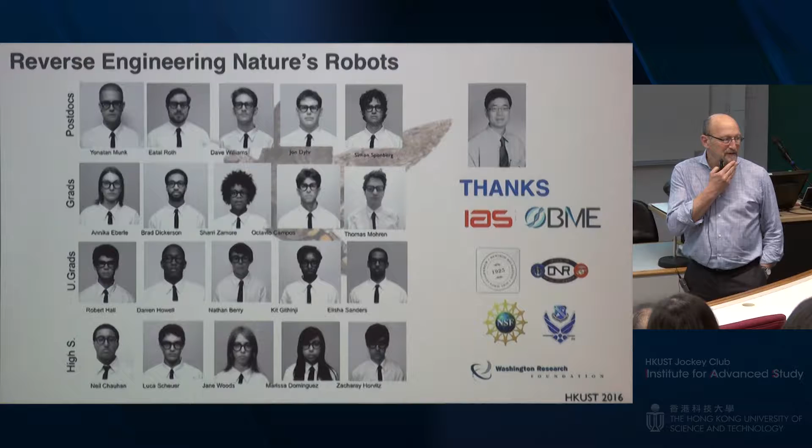The Naval Research, National Science Foundation, and the Air Force Office of Scientific Research are funding a lot of the research I'm going to talk about today. The most important thing is who really does the research and who really does the creativity. I listed here most, but certainly not all, of the people involved in the projects, spanning some fantastic current and former postdocs, and some fantastic current and former graduate students, undergraduates, and high school students who have all been involved in the research in various ways.

I showed this to the group last year, and I wanted to bring it back again. This is a publication that came out from the National Research Council in the US, and it has an interesting statement. It says biological research is in the midst of a revolutionary change due to the integration of powerful technologies along with new concepts and methods derived from the inclusion of physical sciences, mathematics, computational sciences, and engineering.

To be a biologist today is becoming more and more an integrated discipline, one that lies between the physical sciences and the natural sciences. It's just increasingly hard to make great progress without being somewhat quantitative, okay? So that's a message we have for biologists. At the same time, advances in biological sciences hold immense promise for many challenges we face, from food, health, and safety to deep understanding of natural systems.

There was also another study that came out from MIT, a study called The Convergence of the Life Sciences, Physical Sciences, and Engineering.

Essentially what both of these are saying is our traditional bins—I'm in the biology department, I'm in the engineering department—those traditional bins are not particularly healthy. They're necessary for administrative reasons, but they're not healthy. This says the convergence of these domains is a new paradigm for how sciences are being done. Whether you call it life sciences or engineering, there are common themes among all of these, spanning healthcare, energy, food, climate, water, disaster relief, everything. These are really hard problems, but there are solutions useful in nature, and solutions useful in engineering.

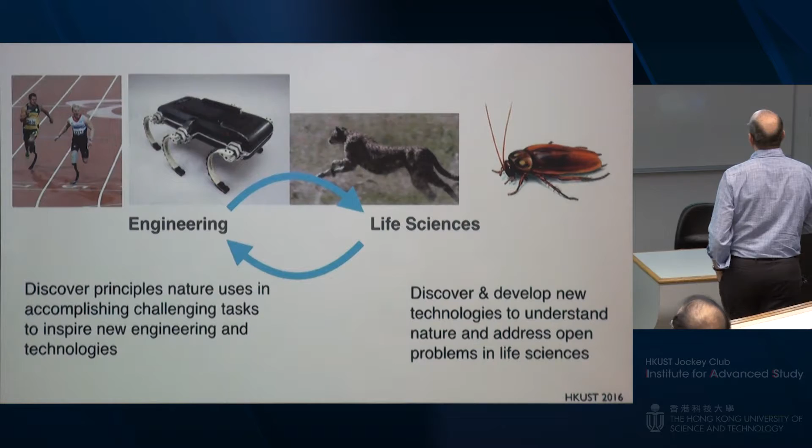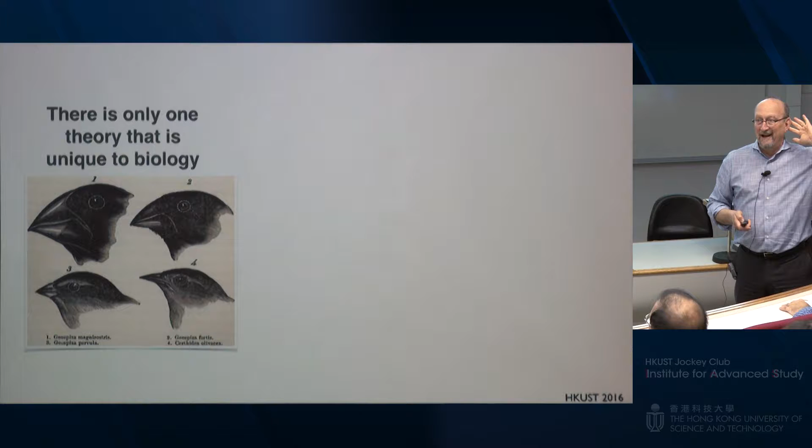Obviously, when we're looking at natural solutions to engineering problems, we have to think about the fundamental theories of biology. As it turns out, there's only one theory unique to biology. What is it? Yeah, absolutely—evolution. Let me drill down on this.

It is a very, very patient engineering process. It takes solutions that are not as successful as other solutions and essentially eliminates those, okay? It's got lots and lots of time and lots of versions, okay?

It relies on three fundamental ideas: there is variation in traits. That is, I'm not identical to Professor Sané, and I'm grateful for it.

And I also have traits that are heritable, so those traits pass on from successive generations. And we have differential survival, although I think we'll both make it out of this talk today, okay?

Evolution is subject to constraints. This came up in the last talk. That is, I'm not free to all of a sudden take my bones and say, you know, I think I'd like titanium today. I have evolutionary constraints, developmental constraints, and historic, phylogenetic constraints. I'm not free to just create anything new. So evolution is this infinitely patient engineering process operating under constraints in history, okay? So that's actually a really interesting idea, that you're solving really, really hard engineering problems given really important constraints. It is necessarily a process that leads to change and adaptation, necessarily.

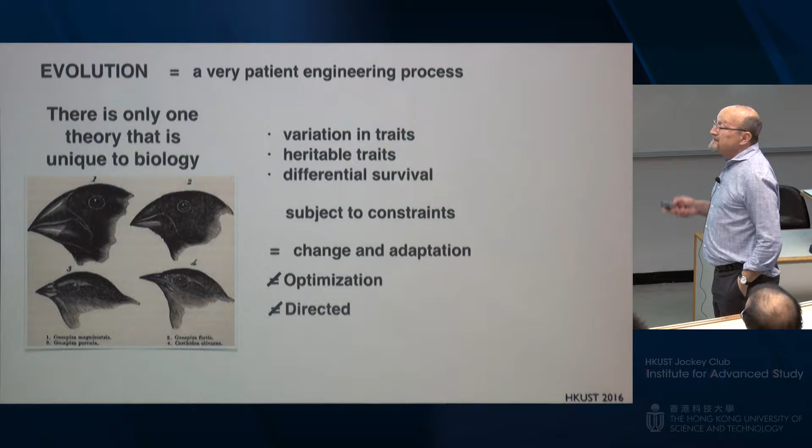It is also not an optimization process. This is often misunderstood. Evolution is not optimizing. It's simply, I can run faster than my friend who's being chased by a cheetah, okay? As long as the cheetah gets my friend, I'm okay, right? It is not directed. Evolution does not say, I will make it better this way.

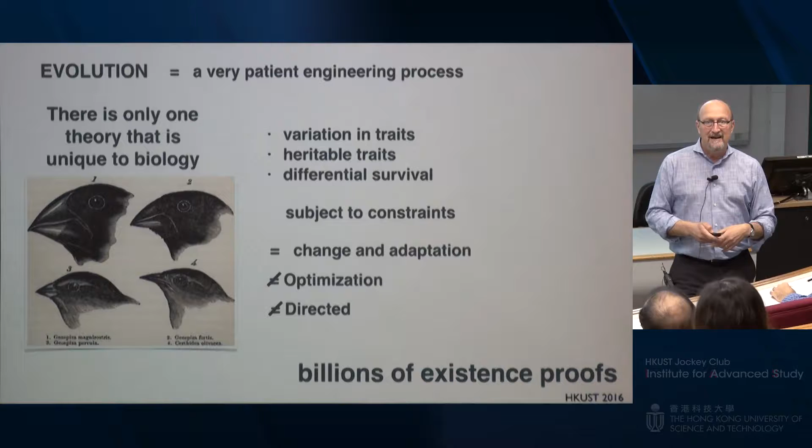But that said, it gives rise to these billions of existence proofs of solutions to really hard problems: locomotion on land, locomotion in complex habitats, obstacle avoidance, flight, swimming. The list goes on. Every habitat of life, every habitat on the planet has an occupant of some living organism somewhere, right?

This idea of evolution was certainly understood at the turn of the century. And I love this quote here, from the New York Times, October 9th, 1903. And I'm looking over at a group here that builds flying robotics. So in 1903, they say, the flying machine, which will really fly, might be evolved by the combined and continuous efforts of mathematicians and mechanicians in from 1 million to 10 million years. I mean, they were being optimistic, actually. They had a sense of the length of the fossil record.

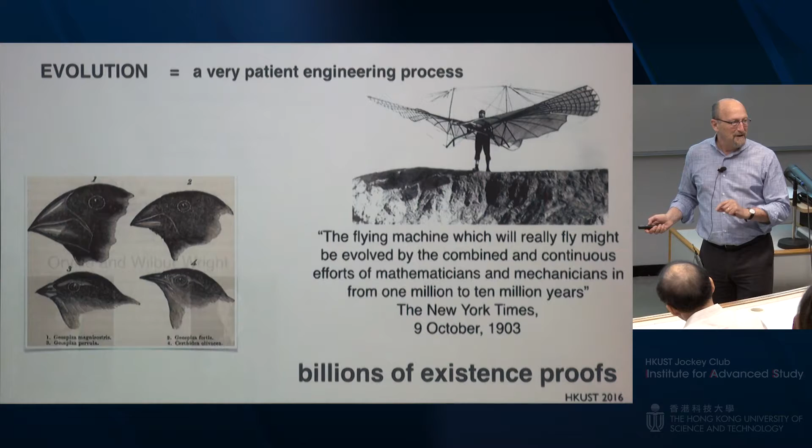That same day, in the diary of Orville and Wilbur Wright, is the following line: we started assembly. And that was for the first flying craft. So they beat evolution by a few millennia, okay? And what they did is they tinkered and basically tried lots and lots of things, right? But you'll also notice that they used some structures that clearly were done from observation. Clearly, it did not come out of thin air. I apologize for the pun.

It came from observation, right? And my favorite philosopher, Yogi Berra, the best catcher in baseball history with the New York Yankees, said, 'You can see a lot just by looking.' Great phrase. And in fact, that idea has a rich history in how we look to nature for our understanding of technologies.

Leonardo da Vinci produced something called the Codex, and actually Bill Gates recently bought the Codex, and that lives now in Seattle, and there's an Italian scholar of Leonardo who's studying the Codex. And there's a section of the Codex about life, and particularly, as it turns out, about flight.

And a recent translation, it gives me chills to repeat this, but I'm going to do it. This is in the year about 1500, okay? And he had been looking at flight and looking at a whole variety of creatures. These are drawings of Leonardo, his imagining of airflow and some ideas of force vectors. This is pre-Newtonian, this is pre-Bernoulli. This is Leonardo. And here's a translation from the section of the Codex called Sul volo degli uccelli, on the flight of birds.

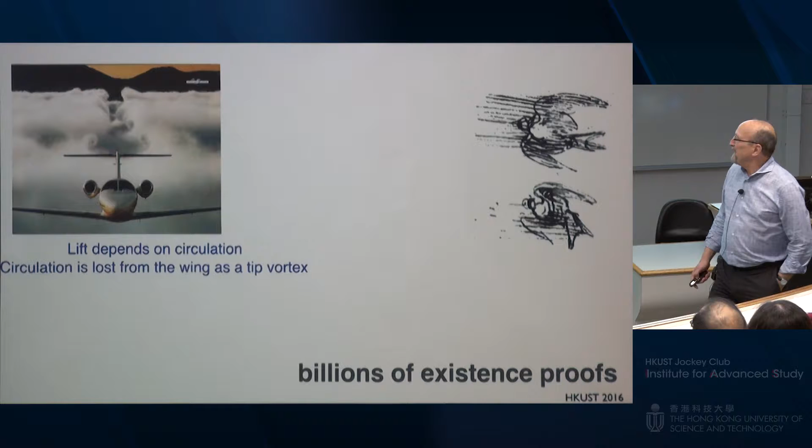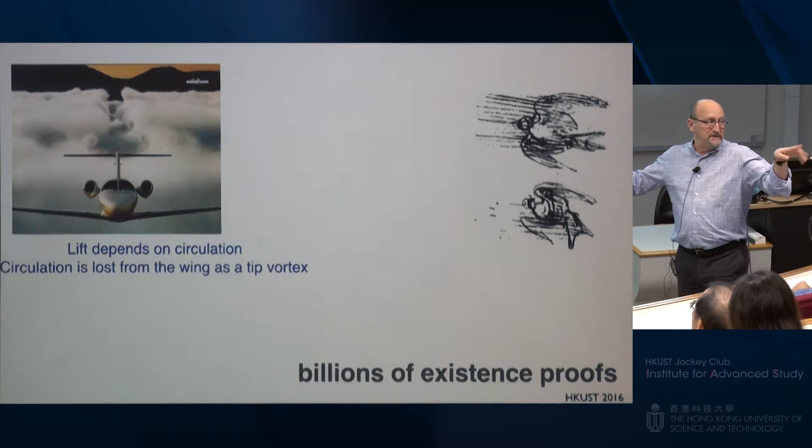This existence proof in our looking to nature in flight has a really nice recent history. Despite our watching nature for millennia, sometimes we ignore things that are totally obvious. This is a picture of a jet coming right at us, and you see in the wake this vortical structure, the vorticity shed from the wings, which leads to a tip vortex. That tip vortex represents a loss of circulation on the wing, a feature critical for the upward forces it generates. The lift depends on circulation, and circulation is lost from the tips in this tip vortex.

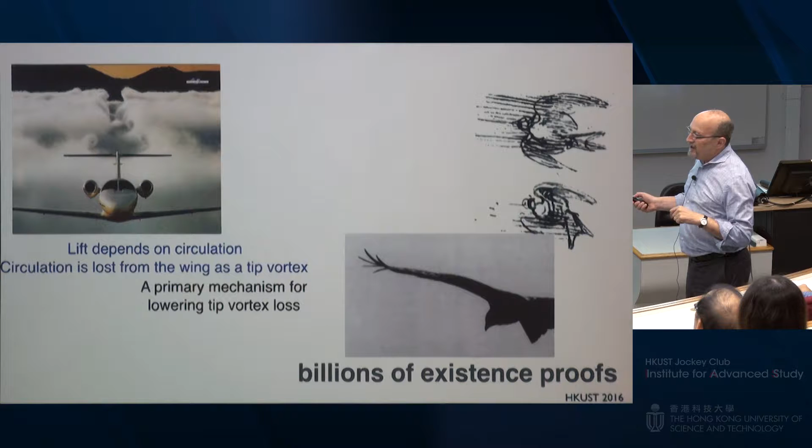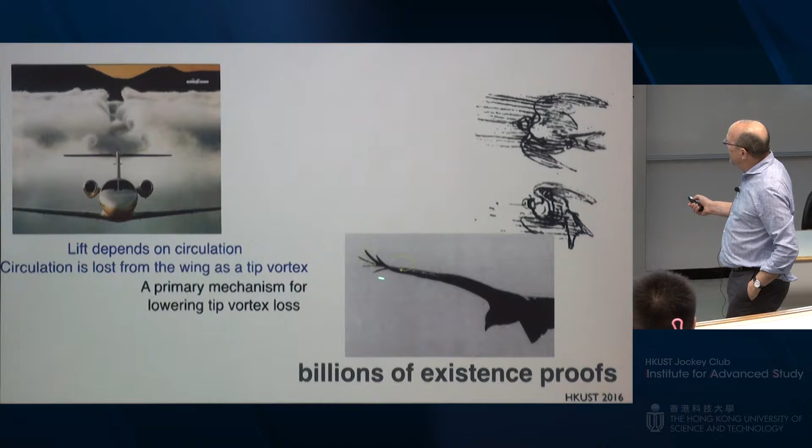In many flying birds, and other examples, the tips of the wing are highly modified into what are called spread wing tips. These spread wing tips are mechanisms that promote retention of vorticity on the wing by a complicated, not very well understood process, shedding vorticity into ever smaller ones and retaining more vorticity in wing-bound structures. It was only within the last 20 years or so that aeronautic engineers started modifying wingtips according to observations from nature—these are now wingtip modifiers. The process had been around, people had been talking about it, but it just took a while to translate from observation to application.

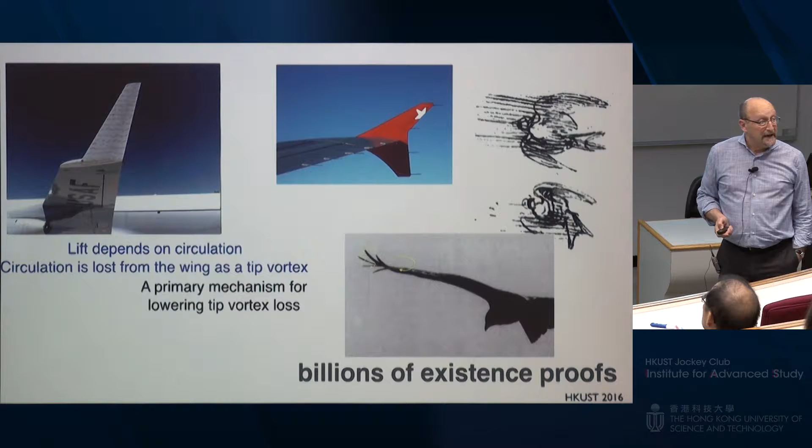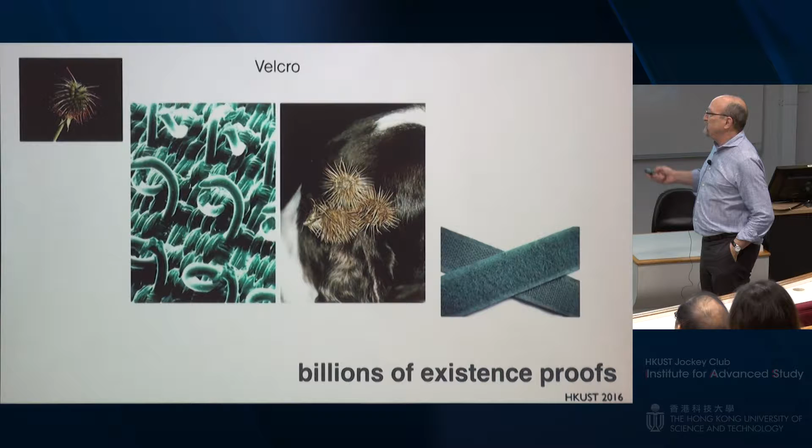The list now goes on—I'm just going to quickly go through a few. Velcro was discovered from burrs; some poor person kept pulling them off their dog, and eventually it gave rise to a really wonderful and ubiquitous, somewhat irritating fastener.

Water repellent paints have been around, but recently it was revealed that the microstructure of the Lotus leaf interacts with the surface tension of droplets to make paints water repellent. It's now called Lotusan—adhesion without glue.

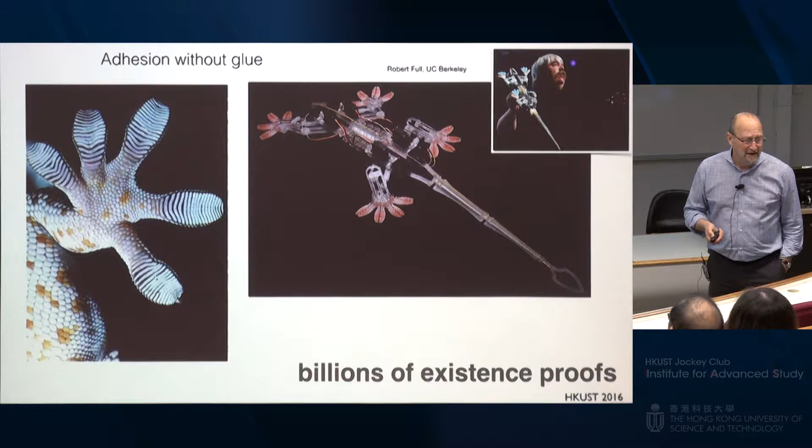This is something Bob Full had been one of the early pioneers on, bio-inspired or nature-inspired systems. He's the editor of the journal Bioinspiration and Biomimetics, one of the founding editors. He spent considerable time demonstrating that the ultra-tiny microstructure on the feet of geckos permits van der Waals forces to form effective adhesion—there's no glue. They've tested it in robotic systems and gone on from there. This is him giving a TED Talk; if you want a really inspiring speaker, bring Bob Full. In many ways, he's a big man in the field.

Water capture discovered passive mechanisms from beetles in the Namib Desert. The beetle has a particular microstructure on its carapace so that when wind blows over it, local aerodynamic effects lead to condensation of fluid, which drains down. A group of investigators took this concept and built passive water capture devices for arid environments. This is just wonderful, and it goes on and on.

Aerodynamic efficiencies in car design, believe it or not, actually is a good design. I've never been impressed by it, but apparently fluid dynamicists are impressed by it.

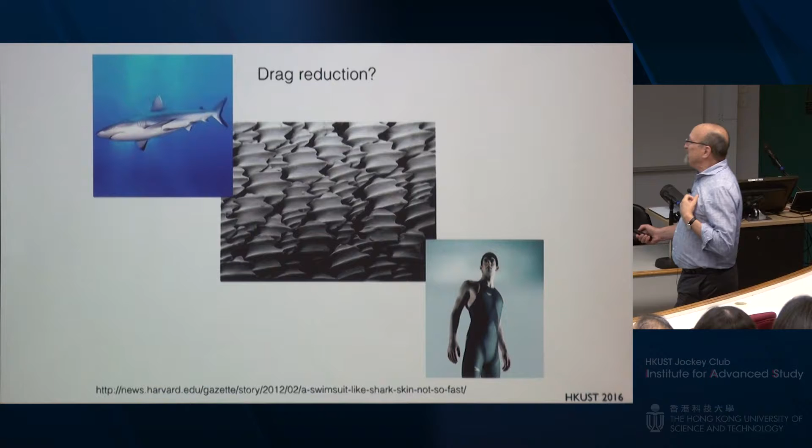One of my favorite stories is going too far. This is a great controversy: sharks have amazing microstructures argued to be drag reducing, and there was evidence that shark skin gives lower shear stresses. They made a swimsuit—Michael Phelps of swimming fame, Olympic medalist, wore a suit with that microstructure. Then there's a wonderful article that says actually it doesn't work. But it was a great idea. So you have this really scratchy suit that doesn't do you any good—it works well for the shark, poorly for humans. There's a message there: don't just copy it and think it's going to work. It works for the shark because of the shark's geometry and how it swims; it works poorly for humans because of how they swim and their geometry. There's some evidence it actually slows you down, which I liked.

Sensing and computing—I talked about that last time, from optic flow sensing and the circuits supporting it, to circuits supporting edge and object recognition, derived from looking at neural circuits in the retina. Those are really, really interesting problems. And of course, the thing I'm going to talk about are inertial measurement units.

So I wanted to just very quickly survey some fun natural solutions to engineering problems—extracting water, swimming, flying, whatever. Then what I'm going to do is focus on two projects. One Sanjay actually worked on with me a while ago—I'm not going to talk about that, sorry.

It wasn't very good work. No, just teasing, it was excellent work. It appeared in Science, but I'm not going to talk about it. And then something that we're just publishing now.

Okay, so inertial sensing. There isn't a flying vehicle that doesn't have some sort of IMU—good luck flying it if it didn't. And nature uses that as well. IMUs are present in commercial aircraft along with global positioning, and they have multiple IMUs. I don't know exactly how many are on a typical 747, but it's not that many, maybe a handful of inertial measurement units.

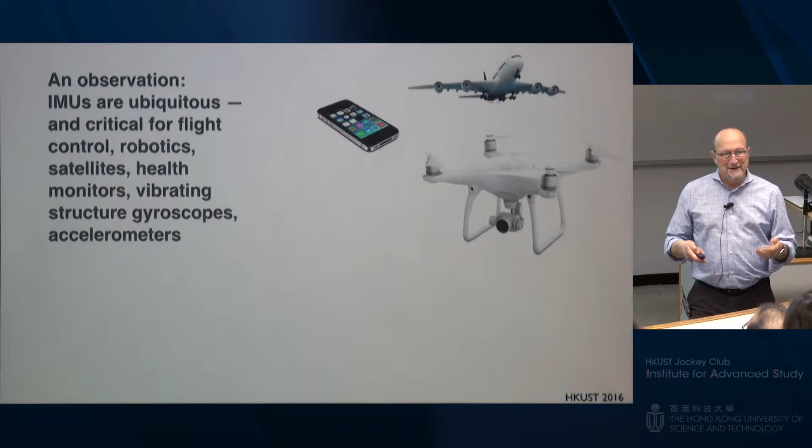Usually at least one 6 degree of freedom unit in a quadcopter, like this DJI Phantom 4, with camera—so it's got vision, it's got an IMU, it has sensing going on, capable of a lot of cool flight dynamics. I have an IMU in my cell phone, as I think most of you do. So they're everywhere, because they're needed for effective dynamic control.

And it turns out that flying animals desperately need them, because if you try to fly with just your visual system, it's too slow—I'll go over that later. Visual flight control is too slow for these inherently unstable devices to work, so they need multiple sensory streams for effective control of their dynamics. In fact, that's a common theme in biology: we need multiple streams of information for most effective control, and the richer and more complex these streams are, the better off we do.

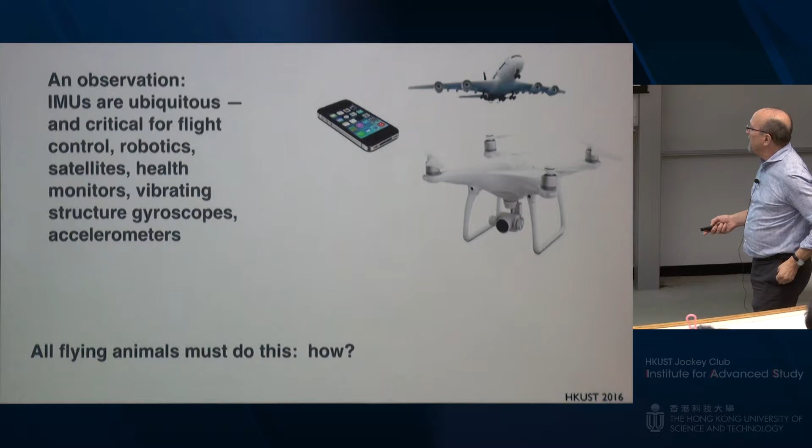Probably the most well-known biological gyroscope or inertial measurement unit is found in flies. Flies have the name Diptera—D-I-P-T-E-R-A—meaning di, ptera, two wings. So all the flies, that whole taxon, only have two wings. All other insects have four wings, and the back wings of these insects are highly modified structures.

These structures are called halteres. We have a collaboration with our colleagues at Oxford on these. These halteres, just like back wings, beat up and down, and as it turns out, they are richly sensed with mechanosensitive structures.

I'm going to do a demonstration of how this haltere works, using my arm. The haltere, just like the wing, beats up and down like this, and the wings beat up and down, the halteres beat up and down. In fact, on one side, they beat approximately anti-phase in most insects—there are details of the control of this.

If you take a mass and move it up and down like this, and rotate in the orthogonal direction, you'll establish a Coriolis force. That mass beating up and down will experience a torque driving it into an oscillation in the off-axis. I'm going to rotate this so it makes more sense—here it is beating up and down, and the scale is roughly pi up and pi down, so it's a huge angular change. But in the presence of an orthogonal rotation, that weak Coriolis torque drives a lateral displacement, operating at about twice the frequency.

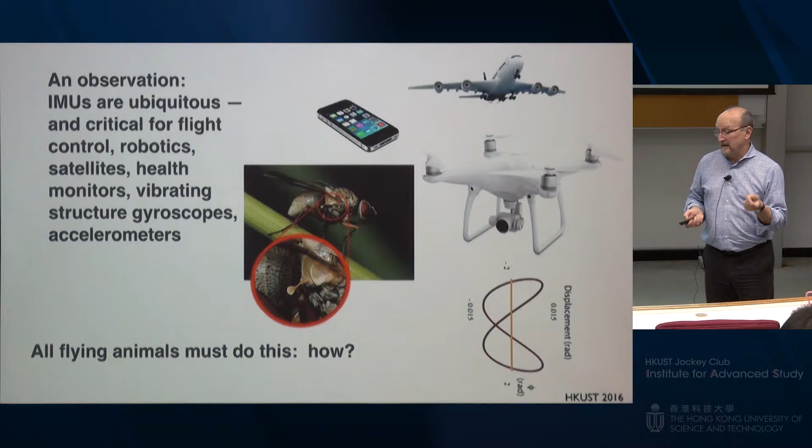That lateral displacement—there's some controversy now emerging on how it's detected—but it is detected by a set of sensors at the base of the haltere. This is a high-resolution micro-CT of a haltere from a fly. There's the knob at the end, so it's got a mass that it vibrates. There's a long shaft, and this array here is a set of strain sensors—actually a row of them. The visual image looks like a line, but there's a discrete set. Cumulatively there's a chunk here, a chunk here, and chunks on the other side as well.

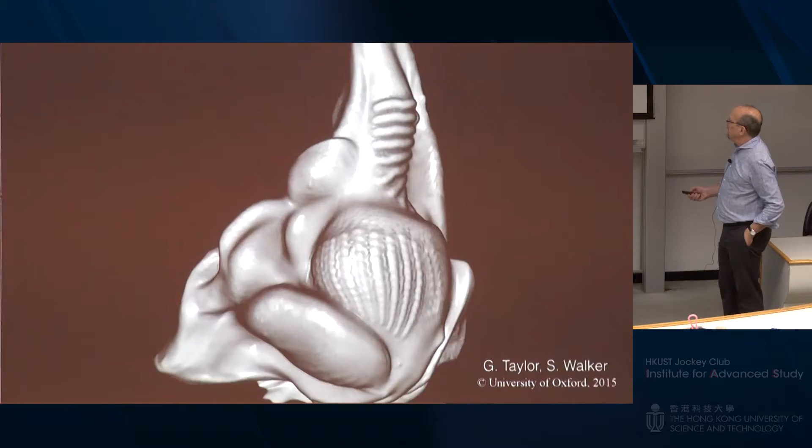That structure has an amazingly complex base, and this is vibrated up and down. There you can begin to see the separate units of sensing—that's a lot of strain sensors at the base. By the way, we have no idea how the nervous system is actually processing all of them. It's an array, and there's something about array detection that we suspect is a very, very interesting problem here.

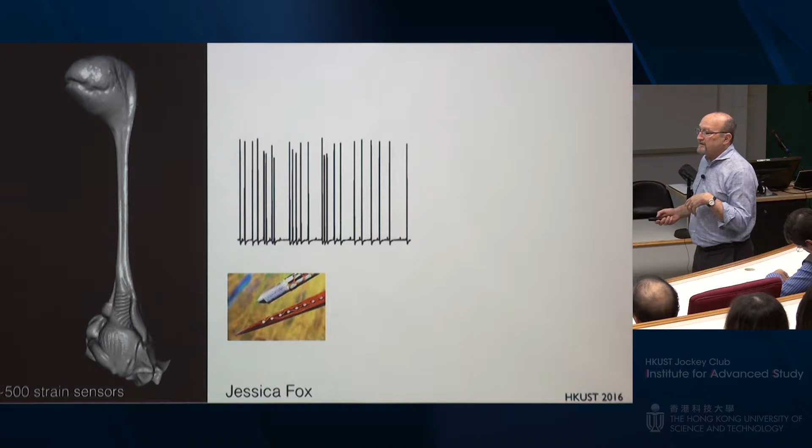What you can do, and what past graduate student of mine, Jessica Fox, now faculty at Case Western, did, is record with very fine electrodes in the axons extending down from these sensors, and measure their encoding properties. I talked about that last time, so I won't repeat it here. But suffice it to say that they encode information at an extremely high rate. Not only are they a dense array, each individual is encoding at a very high bit rate, about 200 bits per second per neuron. Given the number of neurons, that's actually a pretty good sensor that you've just produced.

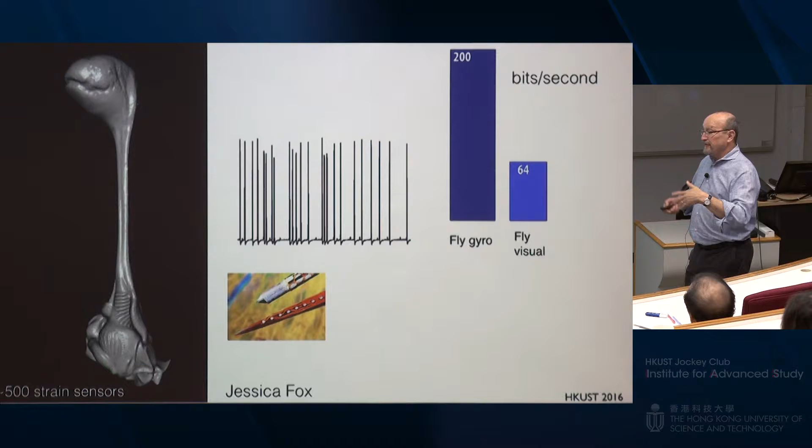The fly visual neurons are much, much slower. Just for frame of reference, the middle temporal neurons in visual cortex of the monkey, for example, would be probably like our neurons, about the same, slightly lower, about 12. So these are very, very fast, very robust sensors, and we're still trying to figure out how they work.

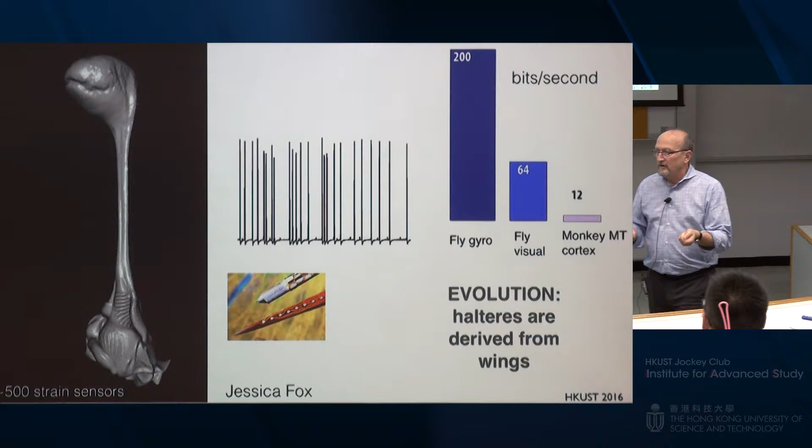I want to come back to that word evolution. Halteres are derived from wings. I'm going to be a little inaccurate, so the biologists in the audience, I apologize in advance, but the inaccuracy is it's not like evolution goes, gee, I need a gyroscope, let me take that wing and turn it into something and use it as a gyroscope. It's not directed. In order for this structure to evolve a gyroscopic sensing function, evolution suggests that its antecedent had to serve at least a little bit of that function, or natural selection could not favor the development and origin of this novel gyroscope. Evolution suggests that flapping wings would have had to, at some point, serve this gyroscopic function.

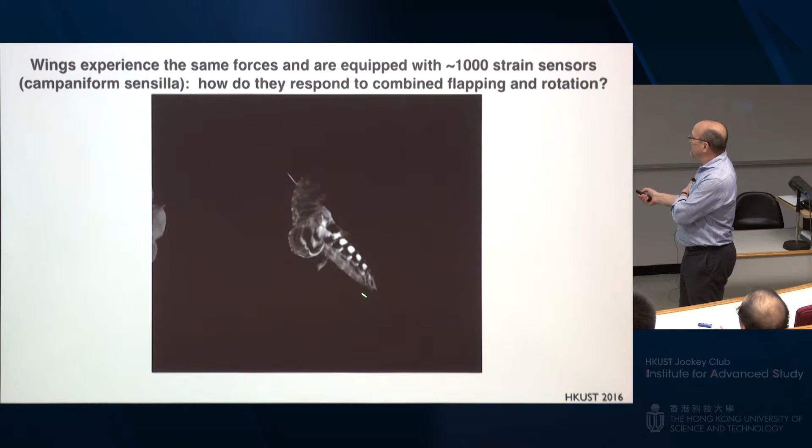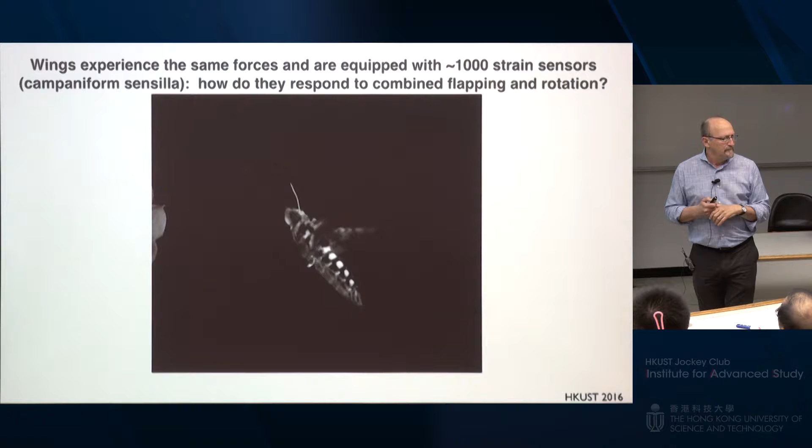Let's think about this problem. This animal here is the hawk moth, Manduca sexta. It's been sort of a model organism in my lab, like everybody else's Drosophila. There are maybe about 30 or 40 labs, probably more, studying these as model systems. They were actually initially developed as model systems for neuronal growth and neuronal pattern formation. Very pioneering work done on that.

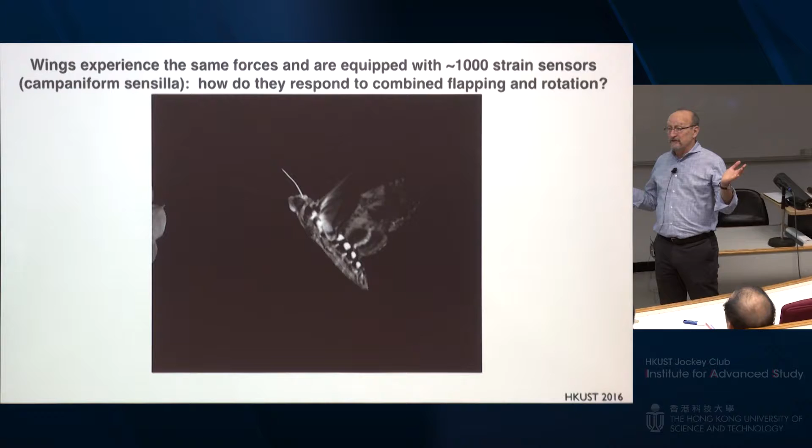It flies around, and its wings are richly equipped with strain sensors, distributed over the surface of the wing. The distribution is fairly well known now. These are four wings; the front and hind wings are coupled. As the animal flies around, I can assure you the wings have mass, and I can assure you they're flapping. If you take a mass rotating in one axis and rotate it in the orthogonal axis, I guarantee you'll have a Coriolis force.

I mean, by definition, you do. It's a distributed mass, and it has linear accelerations, Euler forces, centrifugal, and Coriolis forces all going on. The distribution of sensors on the wing is quite broad. There's about 1000, occurring in two patches of about 200 each at the base of the wing. So just like the haltere, it has strain sensor arrays at its base.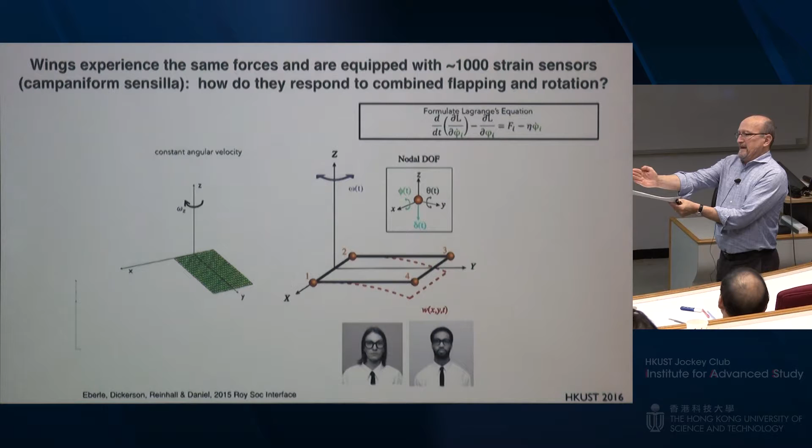The problem we have is that the haltere moves in one axis and is subject to a lateral deflection in the orthogonal axis. If I take a plate like this and flap it in this axis, I'm not going to get a bend in this axis because of the extremely high second moment of area. Well, this is odd. What would a Coriolis force do to a flapping wing? What would happen if I flap this wing up and down with a distribution of mass? I'm not going to get that lateral deflection. I get a different mode of excitation.

What Annika Eberle and Brad Dickerson did in a series of beautiful studies, and these are amazing graduate students, demonstrated that the mode you get using the Euler-Lagrange approach, this sort of simple dynamical systems approach, trying to—oh, did that not play?

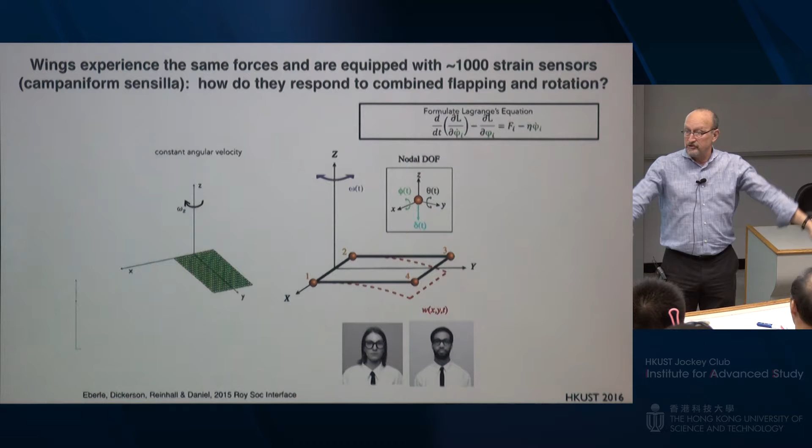There it is, you excite a torsional mode in the wing. Now this torsional mode, I'm showing you an exaggeration. The wing is flapping and rotating, and in response it undergoes a torsional mode. I was showing you that mode in the frame of reference moving with the wing, so it's not just sitting there doing that, but it's doing this motion, and it's excited by the Coriolis force.

Here's another movie that demonstrates it. They start this, and again this is a wing rotating, and we're just staying in the frame of the flap to demonstrate that.

Two other things, and I won't review it in depth: Brad had to demonstrate whether the animal is actually attentive to the torsion of the wing. Can the animal actually use that strain field to detect the effective pitching the wing does? This came out about 1.5 to 2 years ago. He placed super tiny magnets on the wing and did nothing else while the animal's flapping, and the animal flaps around with no particular response.

We give it a visual world and it will respond with visual reflexes. Then he immersed the entire system in a rotating magnetic field, so he could rotate the field and give the animal a mechanical rotational stimulus as well as a visual one. When the magnetic field was turned on, the animal's reflexes were amplified, clearly demonstrating they're attentive to that torsion.

So in a series of studies with Annika and others in the lab, we've gone on to talk about strain sensing, torsional strain sensing in flapping wing structures as a mode of detecting body rotations. Basically the actuator, the thing that moves the insect, could also be a sensor, the thing that reports the body dynamics. That's actually a novel concept, that your actuator and sensor could be one and the same.

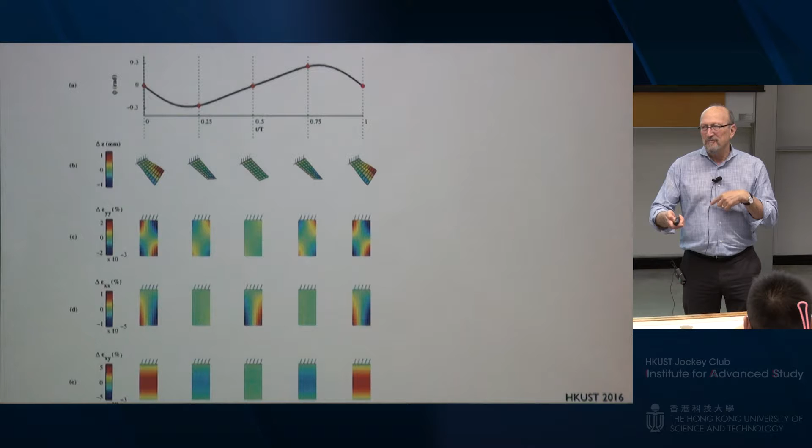The control theorists among you might well ask, what would it mean if both my actuation and sensor are exactly that same device? So we've now done a robotic instantiation of this, building devices that flap and rotate, asking can we use these as effective gyroscopes and propulsors. It's a unique new way of thinking about it.

As I talked about last time, there are neural mechanisms for encoding the information, and can we layer onto this neural processing to make really, really effective flight control systems?

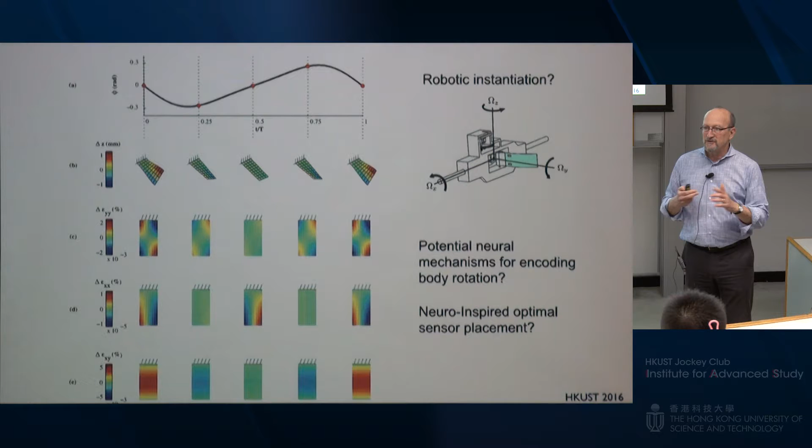This is a case where we looked to nature, did some hardcore engineering - or not as hardcore as you guys do, but for us - put in the college effort, and came out with an idea from nature for a new gyroscopic sensor, a new inertial measurement device. Probably not useful for an airplane; there are relatively few aircraft whose wings flap, and preferably they don't flap at all. But it's still an interesting idea, particularly for flapping flight vehicles.

So it's been, now with Sean Humbert, one of our collaborators, and Sarah Bergbreiter, fabricating flight vehicles with distributed strain sensing. They're using the distribution of strain sensing as a general idea for gust rejection and flight control. Strain sensing has this really nice report that you get before you have a lot of acceleration, so it's really, really nice.

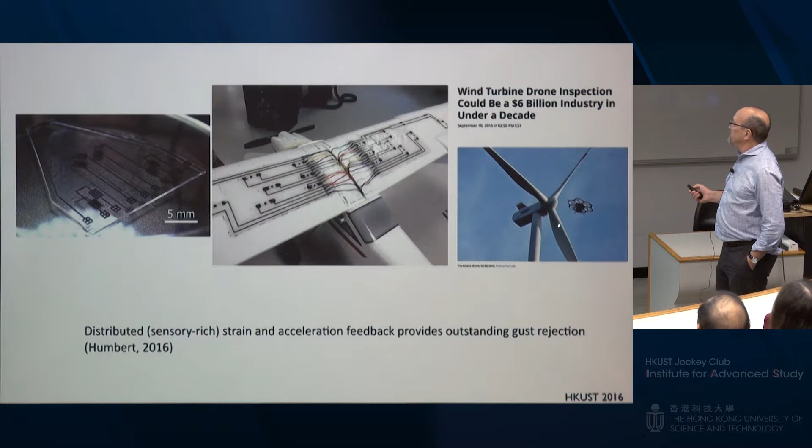Sean is particularly interested in gust rejection - how would you get micro air vehicles or small drones to inspect really dangerous places, say a windmill or something like that. That's a fun problem where you really need this kind of melding of gust rejection and the like.

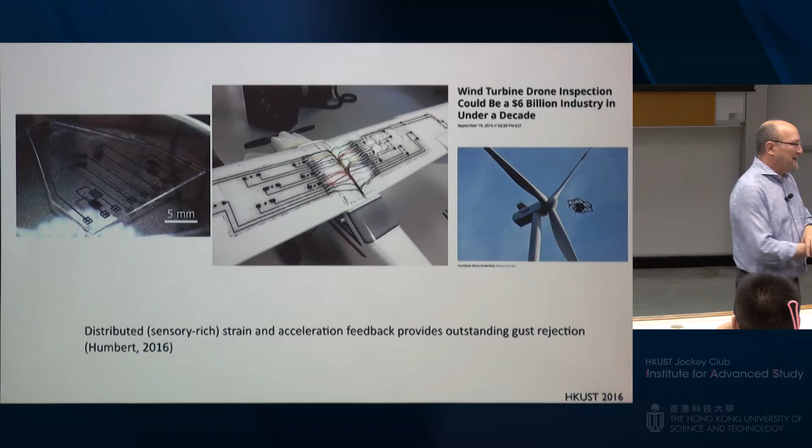Alrighty, last part of my talk. What I attempted to do is give you a little history and then an example of where we are currently looking at inertial sensing, in the service of developing potentially new technologies. Admittedly I'm very motivated just to understand how living systems operate, but I guarantee the more I learn, the more useful information I will get for potential technology.

But let me also own up to the fact that there's this, what I call biology with no apology. That is, engineering can help me understand neural systems, and I'm fine with that.

So what I'm going to do is dive into something that we just had accepted, using engineering methods to try and tease out how neural systems resolve multiple streams of sensory information. This is a hard problem. As it turns out, the neuroscience community has been using an experimental approach that I think is, at the end of the day, unwise.

Okay, so here is that hawk moth. This is a video by my colleague and collaborator Mark Willis, one of the best biologists I know - fantastic neuroscientist, fantastic behaviorist.

This is what hawk moths really do. They come and feed from flowers, lay eggs, mate, and die. It's a pretty simple life. As they feed, the flowers are moving, and the animal has a very long, thin proboscis that it must deploy and insert into the flower while flying, tracking the flower to get the nectar out. That's a hard problem. I'm impressed they can do it, and they do it all night long.

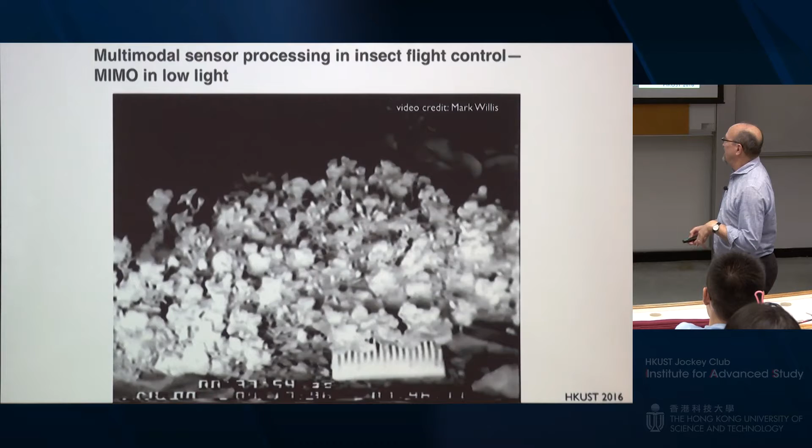Here again is my moth flying, and let me remind you of the sensory modalities it has. It has chemosensory pathways, so it detects flowers chemically, with some of these sensors in the antennae, some on the feet, the tarsi, and more. It also has eyes, and several really interesting low light processing circuits, operating in very low light environments.

That's going to be a problem, because under low light I need to keep my shutter open, which means my visual delays are long. They also have, obviously, this mechanosensory stuff we've been talking about: aerodynamic, gravitational, proprioceptive, and the like. This rich set of sensory modalities, with multiple inputs, appear as multiple outputs. So this is a MIMO system, multiple input, multiple output, with wings, abdomen, head, legs, antennae, everything being controlled based on the sensory data flow.

Vision is generally slow, and our group has spent some time documenting this. The visual systems have delays on the order of 100 to 200 milliseconds. The darker the environment is, the longer the delay, just like when I take a picture with a camera, the darker the light levels, the longer I have to hold the shutter open. We wanted to explore whether we could use robotics to probe how this neural shutter is working. It's an interesting problem.

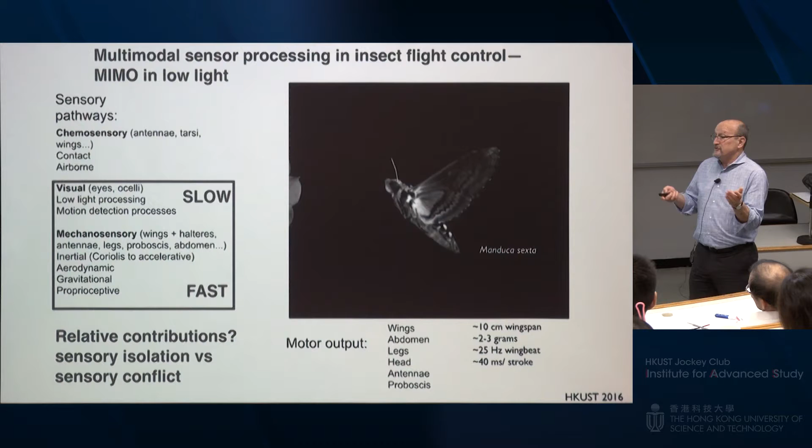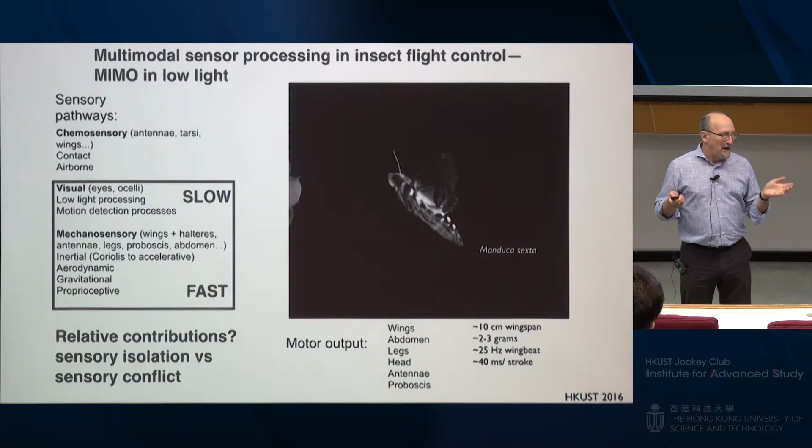So we're going to use traditional engineering approaches. But I'll preface this by saying what a biologist might have done: if you want to know how important vision is, take the eyes off or block vision and look at everything else. If you want to know how important mechanosensing is, say while feeding from a flower, cut the proboscis off and see how it does. Now, the reality is no insect can fly without vision, so that's already a problem. I can't do what we call sensory isolation, which is a very traditional neural approach. And they're not going to flower track if they don't have a proboscis. So we have some practical limits to doing sensory isolation, but I'll argue there are also intellectual limits why we shouldn't.

This is not bio-inspired robotics, this is robot-inspired biology. So we have these robotic flowers that we built, and I'm going to walk you through some examples. This particular one is moving in a very erratic manner on purpose. That erratic manner happens to be a superposition of about 17 sinusoids, literally superimposed on purpose. So it's not white noise motion, it's discrete, linearly superimposed sine waves, giving this really erratic, unpredictable measurement.

I'll put the crew up here. Eatai Roth is probably the pioneer in using system identification methods for freely flying or freely behaving animals. Simon Sponberg, a postdoc currently in the lab, is now faculty in physics at Georgia Tech. Robert is in the Peace Corps now, and Jon Dyhr is on the faculty at Northwest University. These are all involved in various parts of this project.

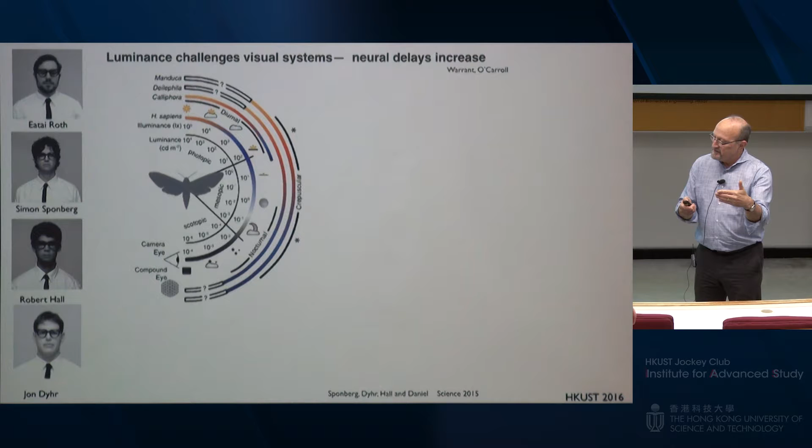The first part of the project asked: if I have this moth flying around tracking this device, and I change the luminance levels so the neural filtering changes, could I use the behavior to actually predict those changes in the neural filter? If you think about this, everything stays the same. The animal is feeding from this robotically actuated flower. The plant is the same, meaning I mean the engineering term 'plant,' not the plant itself.

The physical structure is the same. It's still the same moth, weighs about the same, has the same wings. So everything is identical—I'm just going to drop the luminance levels and look for adaptation in the neural filter, using robotics to probe something in the emergent dynamics over a broad frequency range. We track the flower robot motion and the animal's motion. This just came out in Science a year ago.

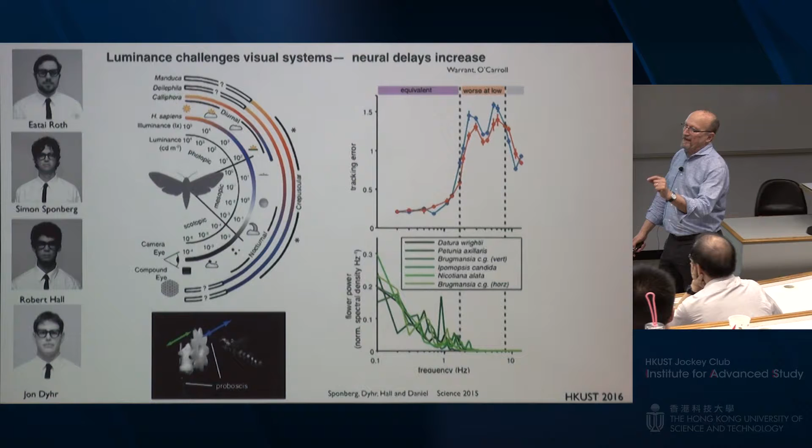This tracking behavior is done under two luminance levels, bright light and dim light in blue. It turns out the tracking error gets worse under dim light, exactly as we predicted, and it gets worse at the frequency domain we predicted to get longer, based on work done by Eric Warrant and David O'Carroll.

But what we found rather interesting is it doesn't get worse out here—effectively under low frequencies, under the discrete frequencies of the flower motion. These are below a hertz, and there's really no difference with light level. That is, the motions are sufficiently slow given the delays.

What we found interesting was the evolutionary consequence: if you look at the power—flowers in the natural world, subject to wind, vibrate. This is the power spectrum of floral vibration in natural conditions, call it the flower power. The flower power declines dramatically, so in fact they don't even move very much where the visual delays get large. So the visual delays are permissible given the function the moth has to do.

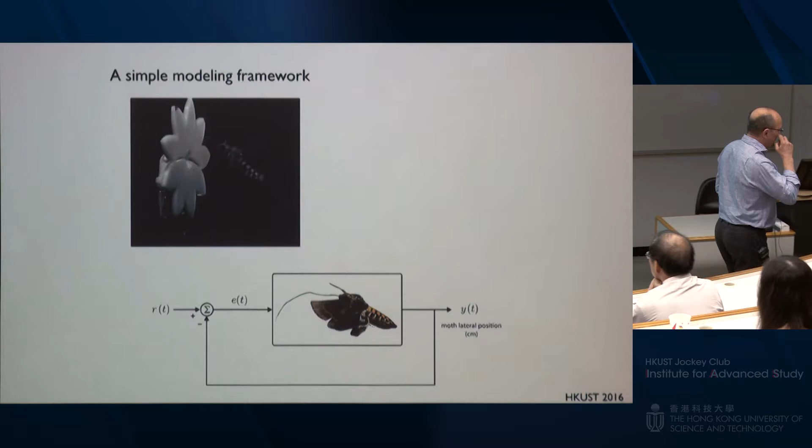That's something we just completed. This is what we're in the middle of now, and this is my last story. So I have this moth feeding from a flower, and obviously the flower's moving. The moth can see that the flower's moving. But the moth also has this proboscis in the flower, and it's feeding from it—chances are it has mechanosensory information.

How would I go about resolving how important that mechanosensory information is? I'll tell you immediately that based on the literature and our own experience, we didn't think it was important. We had a few reviews of some of our past papers where a reviewer asked, how do you know that's not important? We said, well, they're so visually dominated.

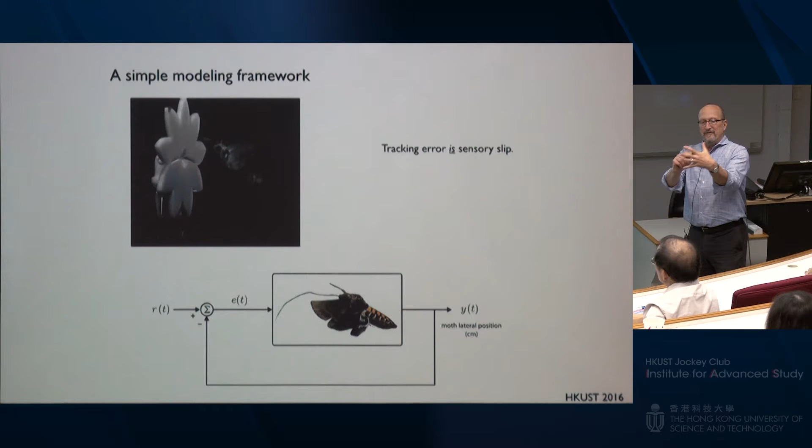Let's follow this through. In this particular instance, as the animal's moving along, I have the floral face and the nectary moving together. If there's an error, if it doesn't track it well, it gets what's called sensory slip—that is, the visual signal slips relative to a reference frame. That's called sensory slip, so the tracking error in this instance is sensory slip.

If, however, I have two modalities—mechanosensory and visual sensory—both neurally processed through activation, through the biomechanics of the body, to some dynamics, I have a slightly different situation. That is, if one is moving and the other wasn't—in an intact flower they obviously move together. If these were conflicting, a conflict implies the error across the two modalities cannot be minimized. If it's a single modality, you can minimize that error, but if you have a conflicting one, you can't.

So what Eatai did is he built an ingenious robotic flower that consists of two parts. The robotic flower you saw earlier has the floral face, and behind it, where the nectary is, a separate robotic controller—they just happen to move together because they were programmed to do so. In a slightly modified version of this experiment, he can hold the floral face that the animal sees—there's a little slit where its proboscis goes—and move the nectary separately, so the animal has a visual signal and a separate, conflicting mechanical signal.

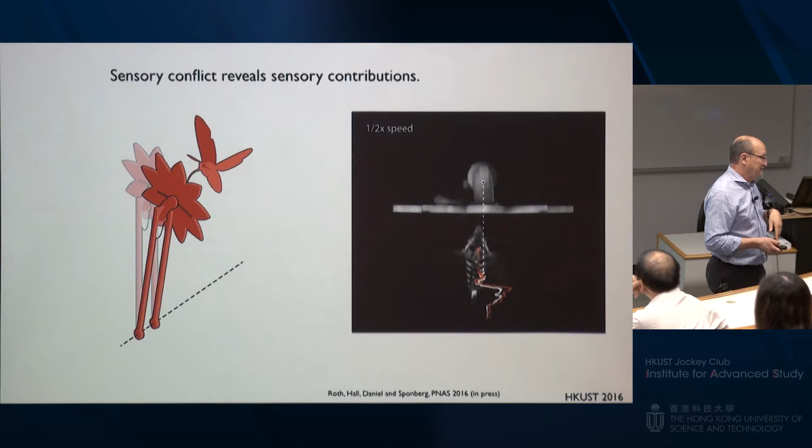So here's the fully intact one. And I'm tracing - I am not, Itai - actually Itai isn't, the computer is tracing the animal and the flower. And you can see the two dots that we're digitizing in real time. And it's pretty good.

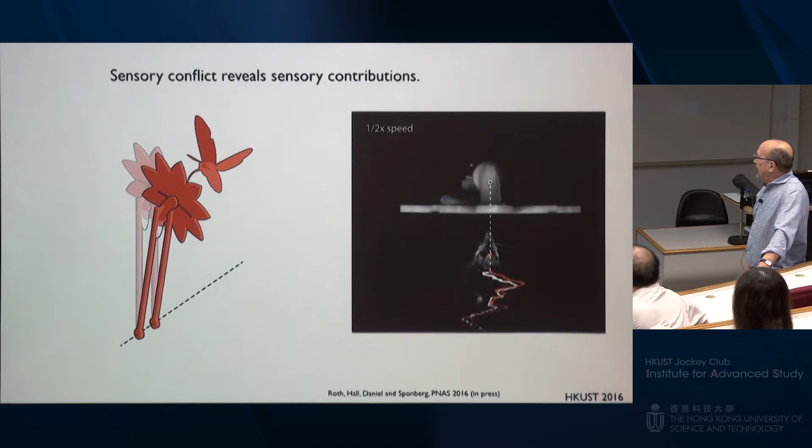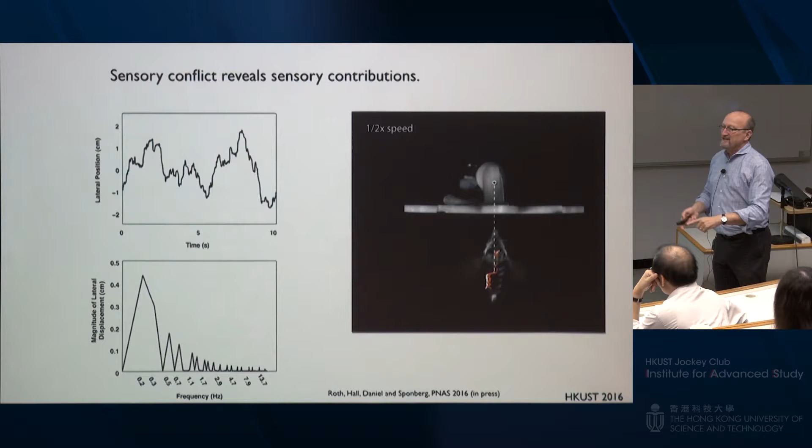Here is a demonstration of the actual input of the flower. This is the frequency spectrum of it. These are discrete frequencies that we specifically programmed. And just for those among you who are linear systems freaks, these frequencies happen to be prime numbers. Because they're prime numbers, no frequency is a multiple of any other frequency. So if we see energy in at a frequency and energy out at a frequency, we can be sure that there's not something strange going on.

So series of prime frequencies, there's the animal's FFT. It's doing a really good job. I'm actually impressed, okay? But we knew this all along.

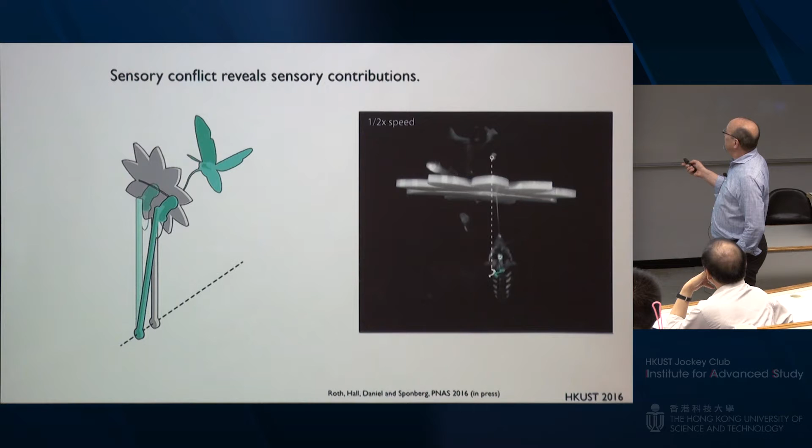Here's the other experiment. There you see in the back, the nectary moving, and the flower is staying the same. This is going to make you all want to just study animals, isn't it? It gets meaner. Hold on. And here again, not bad.

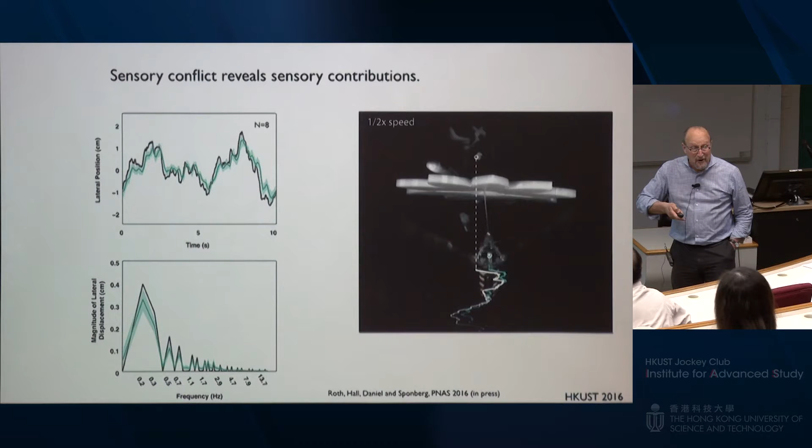So you have to understand my lab had been going, visual information's driving the behavior. I can't tell you how many talks I gave saying these are visually motivated behaviors. And I don't think so.

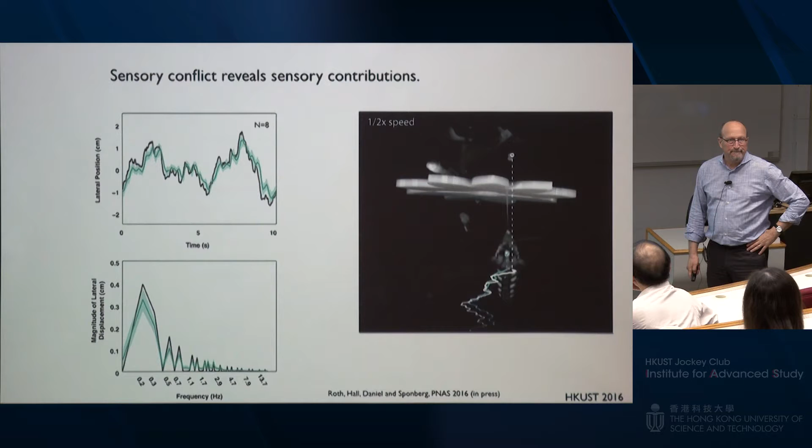Let me keep going. Here is the other experiment. Now I'm moving the floral face, but the nectary is intact, not moving, and it's doing poorly. Not horribly, well, pretty bad. So in this organism, this animal, is doing quite poorly. The gain here, I'll talk about this in a minute, is much, much lower. You can still see the energy at all the frequencies, but it's doing much - that modality is not helping it. So there's a conflict.

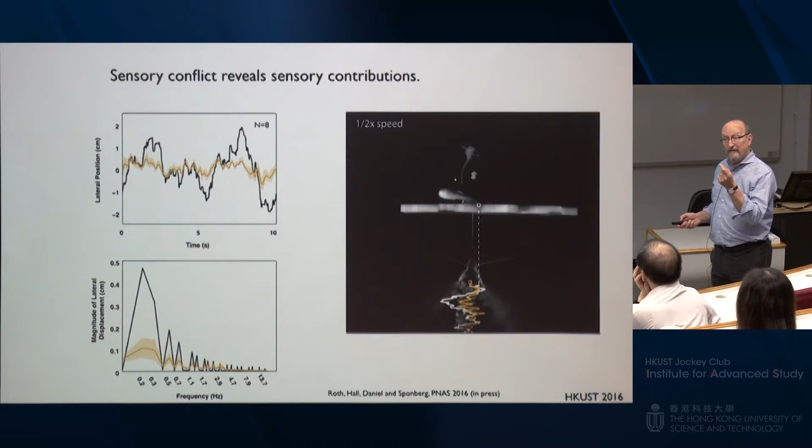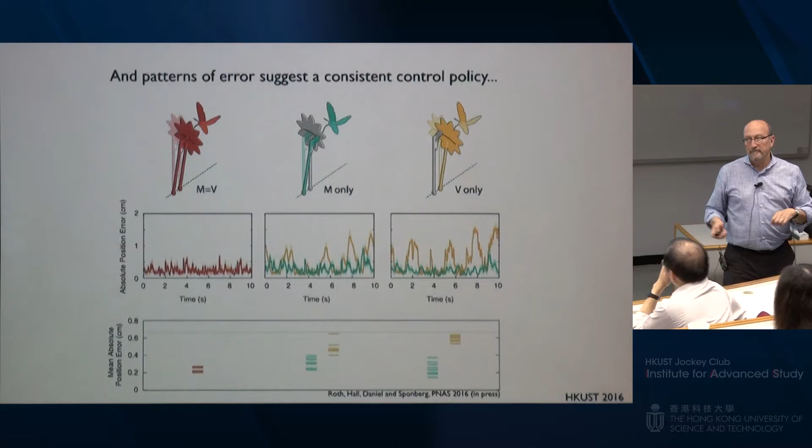Little tiny tutorial, sorry, it's more for the students on linear systems and Bode plots, because I need to show you something called a Bode plot. So a linear system, the defining properties are they scale and you can superimpose them. Scaling means if I double the input, my output will double if it's a linear system. If I halve it, it halves. So it's just straight scaling, a wonderful feature of linear systems.

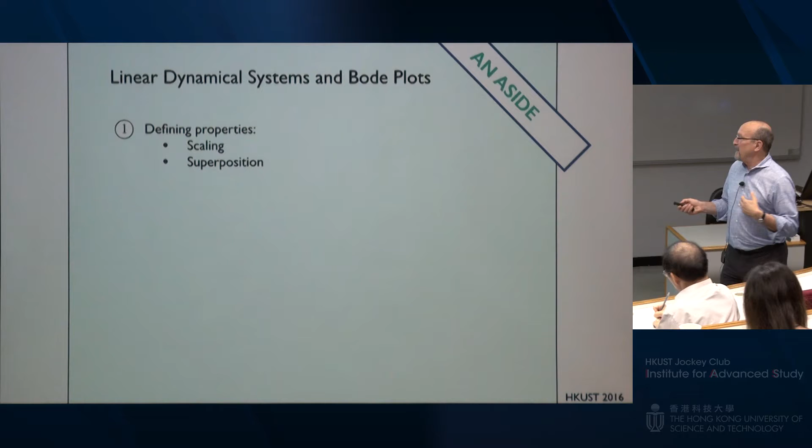And they're superimposable. That is, if I take input 1 plus input 2, the output for input 1 and the output for input 2 linearly sum if the inputs linearly sum. Those are the principles of dynamical linear systems. And then if you put a sine wave in, which is a temporally varying signal, you will get a sine wave out at that frequency if it's a linear system. And at any frequency, if you have a sine wave in and a sine wave out, the ratio of their amplitudes is the gain.

So I'm going to use gain. And then there is a potential time shift, which we'll call the phase. So I have two things that are frequency-dependent features, and these are called the gain and the phase. And that phase and gain can vary at any particular frequency. And therefore, finally, Fourier - I just love Jean-Baptiste Fourier. Well, I never knew him, but I think his work was great. Continuous signals can be decomposed into their sums.

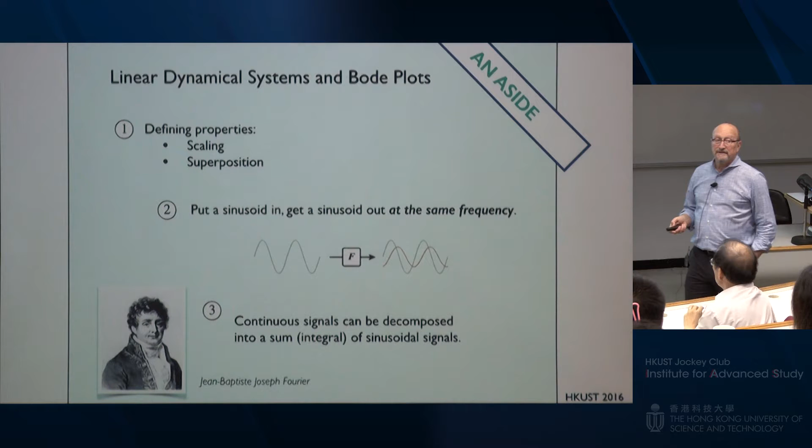So a reviewer says, that's pretty good evidence, but I'm not super convinced this is really linear. If it's really linear, you should be able to give any arbitrary signal and predict its output. You should be able to actually drive the animal at any desired frequency you want. Well, we could just literally move the flower at a single frequency, and I guarantee you it will track it at that frequency.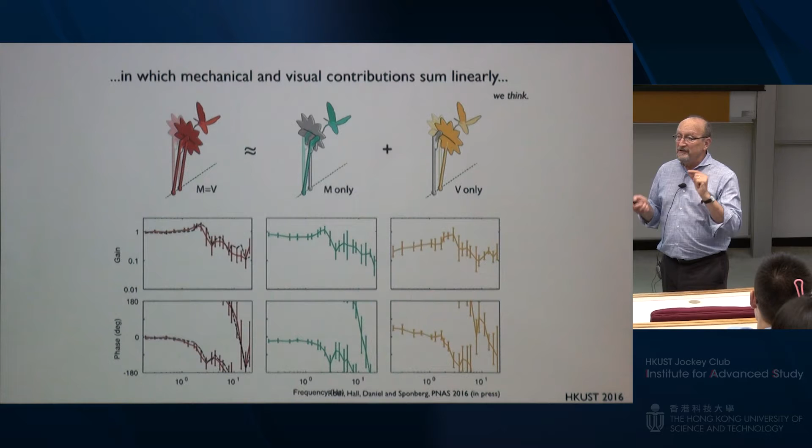The skeptical look I just got. It's like, really? Let me show you how this looks. Here's the Moth, and now watch. I'm doing something really weird in the front and the back. Wow, what a mess. What am I to do, says the Moth, right?

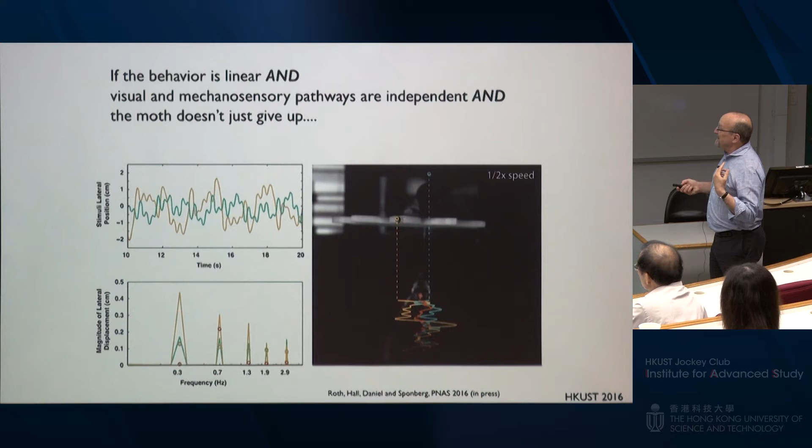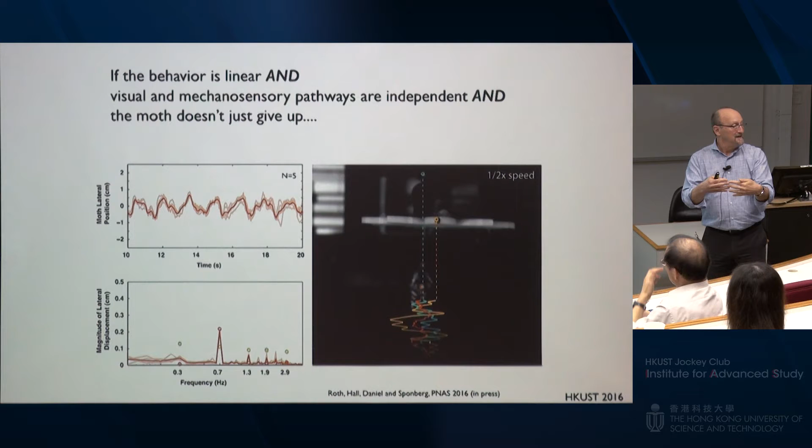So if, in fact, it's linear and the Moth doesn't just give up, I should get exactly what we got. We specifically drove it at a frequency of 0.7 hertz such that all the other inputs had their phases such that they were destructively summing and only one was constructively summing. Reviewer says, yeah, but how do you know moths just don't prefer to fly at 0.7 hertz?

Okay, try a different frequency. I'll not bore you with that. It goes on, and lo and behold, you'll see it's doing pretty good. There's the motion that we get out. So that's the actual time series, and there's the spectrum. There's a little bit of bleed off to the side. It looks pretty strongly linear.

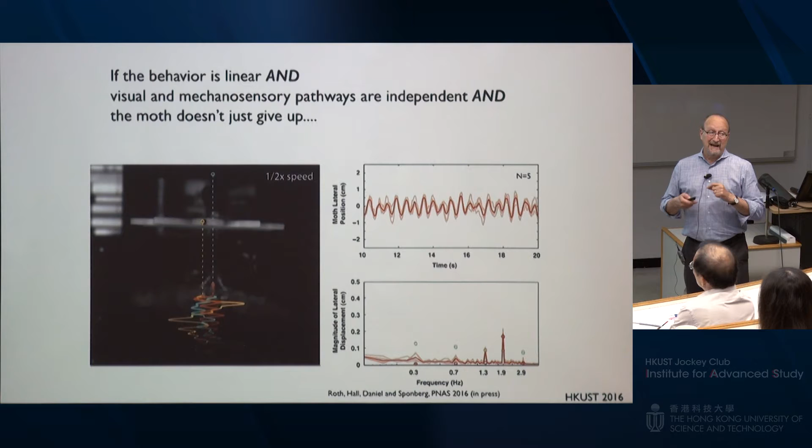That's great. Let me remind you, all we were trying to do is ask how the nervous system assembles information from different sources. We're using engineering methods to understand that. I'm not trying to inspire a refueling system on an airborne airplane, although the refueling in airborne aircraft could use this kind of thinking - you just need a long, sensitive proboscis and trust the data coming in over your visual data, a lot, like 3 times your visual data.

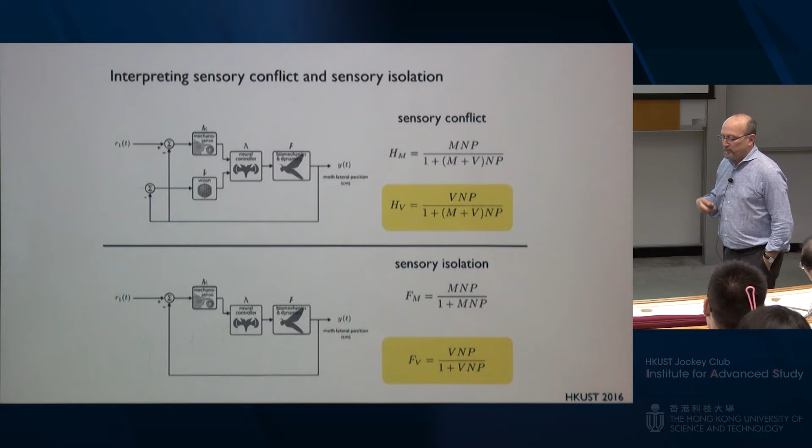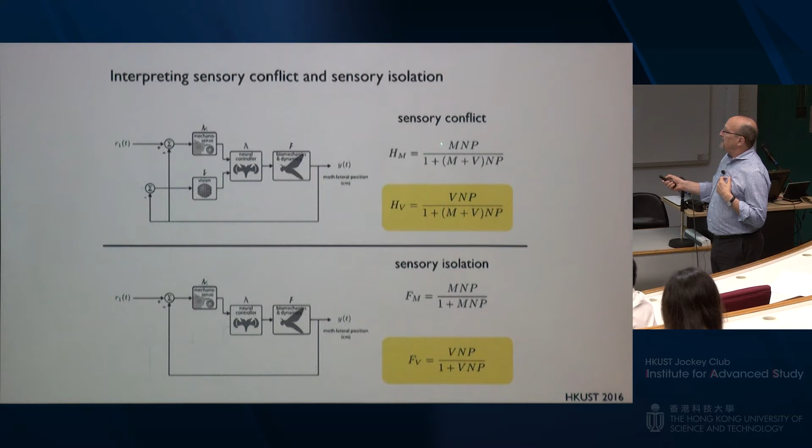I told you earlier that the sensory conflict experiment let us pull apart these relative influences, and we could test it accordingly. I'm running a little long, but let me just say, we could mathematically do the sensory isolation experiment, which we haven't done physically. It's very difficult for us to remove mechanosensory information, but mathematically we can do this. We simply redefine the transfer function for something that's simply absent mechanosensory information. We simply cross that M out.

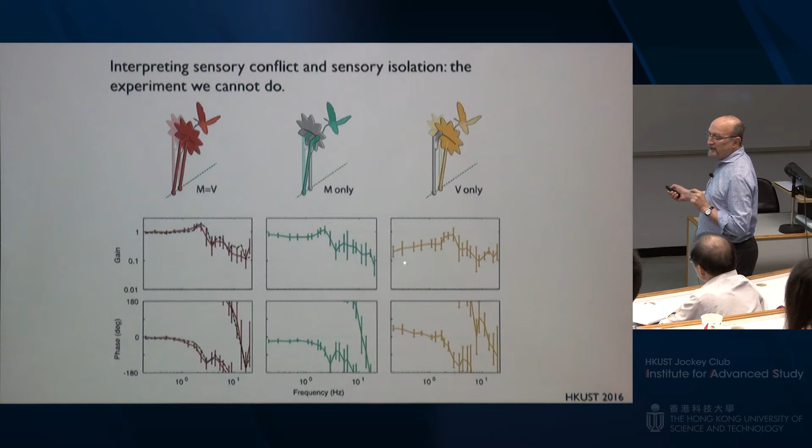And what's interesting is if we were able to do the experiment of just canceling the mechanosensory information - this is not an experiment we have done yet - we would make a prediction on how well the animal would do without the mechanosensory information, not in conflict, but without it. So here's our original estimate of what's going on. Notice it's doing very well here, relatively poorly here. So what happens if I remove the mechanosensory information, or the other way, remove the visual? Each one in and of themselves, if they operated in true isolation, they would do very well. Let's see why that is the case.

This is a transfer function for a system in which you've got a linear superposition of the two inputs. And we've rather strongly, I would argue, demonstrated linear superposition, okay?

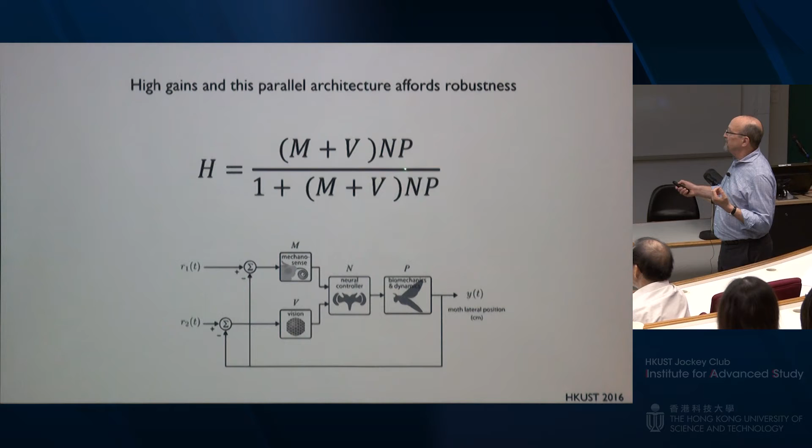So I have the gains of the mechanosensory and visual sensory through the neural processor in the physical plant. Let me just put approximately what these gains are. Don't worry about the physical plant. It's good that I put the plant in green.

But the mechanosensory system is about three times greater than the visual sensory gain. And what's really interesting about this transfer function, if we're looking at tracking performance, is in this particular instance you have 20 over 21, you're doing about 0.95. Use that as your frame of reference.

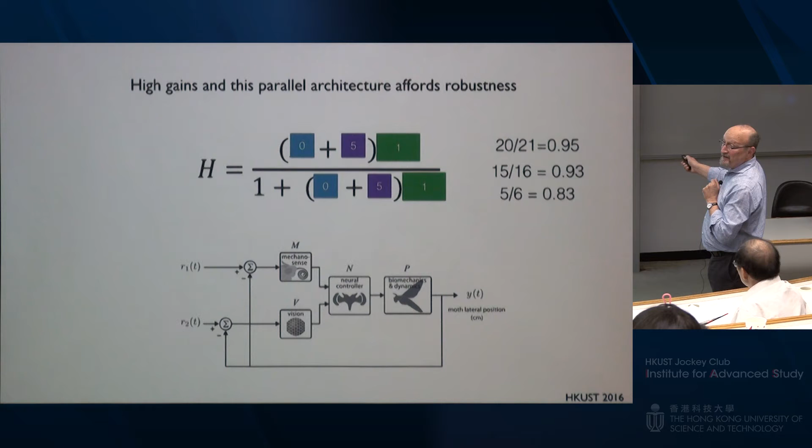Now let's say I completely eliminate the visual sensory information, or the mechanosensory information, right? Here I've eliminated it, so it should be the other way. What just happened here? Well, look at it this way. If I make the mechanosensory information zero, I get 5/6, right? If I make the visual information zero, I get 15/16. These are fundamentally doing really well, in and of themselves.

So this system, this high gain in parallel summing architecture, actually gives a robust response. That is, it can completely knock something out. Even though it looks like you need that mechanosensory one to run that behavior, when it's conflicting it overrides the visual. But absent mechanosensory information, it would do quite well.

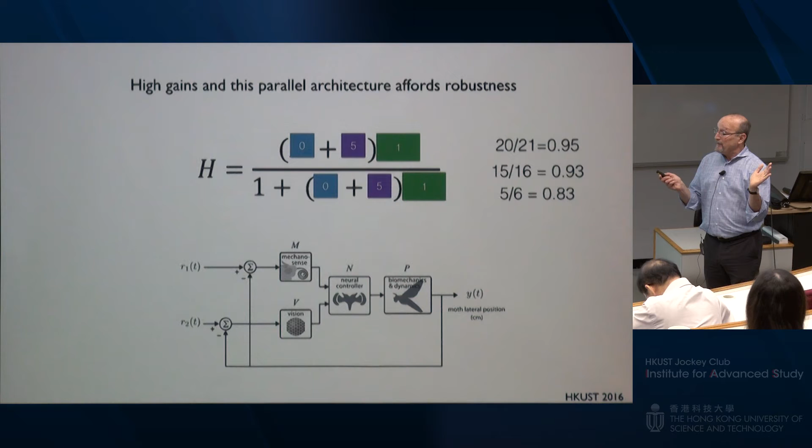So this is what the control theorists tell us about the biology. That is, parallel structure with high gain affords robustness. So the flower tracking behavior is mechanosensory dominant, but that doesn't mean that if you kill mechanosensory, it can't accomplish the behavior. That means if I did the sensory isolation experiment, I would have drawn a conclusion - oh, the animal does perfectly well with vision alone, therefore all that's needed is vision - I would have drawn the wrong conclusion, right?

A linear model does a beautiful prediction. We're stunned by that. Fundamentally, this is a whole series of nonlinear cascades that give rise to this behavior. The aerodynamics are nonlinear - this is flapping flight, right? The sensor processing is nonlinear. But it's in closed loop. And because it's in closed loop behavior, it's always pushing back to the equilibrium. So it's always approximately linear, and we should not have been surprised in retrospect.

But we were. The sensor system doesn't seem to be doing any reweighting that we can tell, but we're going to check that. Lingering review comments: linear summation with high gain affords robustness. And sensory isolation is not often possible, but may be undesirable.

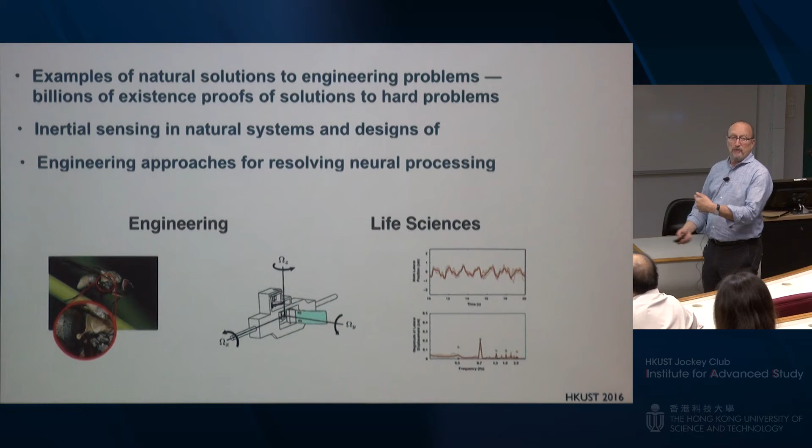So we looked at examples of natural solutions, some inertial sensing, and engineering approaches. I was trying to do this two-way street. I want to just conclude by saying keep the dialogue open between life science and engineering both ways, not just one way. Thanks to all of you for your patience.

Yeah, I have a burning question. Oh, shoot. You weren't one of the reviewers, right?

No, when you make those conclusions, multisensory pathways integrate signals. But the experimental moths, those animals, were they captured from nature, or do you grow them in a container, never exposed to two different natural flowers? So, in other words, in nature, the flower has been trained, and the animal has been trained. So these two systems are already interacting by training, just like we go through university and science training, then we know how to do science. Then you make those conclusions, right? So they go through training. What if you raise those moths in an isolated container, never exposed to a flower? Would you get the same conclusion?

So two things. These moths are raised in isolation, never exposed to the flowers, so there's no training, okay, number one. Number two, you can take wild moths, and they'll do exactly the same behavior. So one of the advantages of insect model systems is that you have these innate behaviors that you can explore. There isn't a ton of learning, although you can, and I think you might demonstrate learning in certain kinds of associations, right? But at this scale of behavior, what I would call the sensory motor loop, that really tight inner loop, closed loop behavior, there doesn't seem to be a lot of learning.